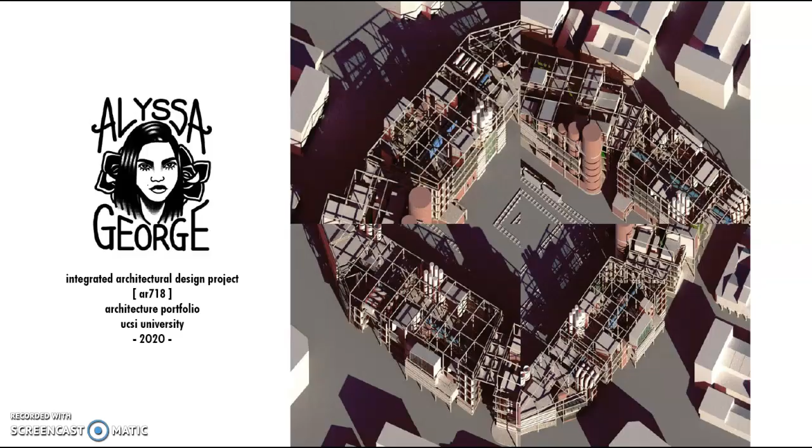George, and I'm in my final semester at UCSI University. Today I'll be presenting to you Kopi O, which is our final semester project located at Bukit Mertajam, Penang.

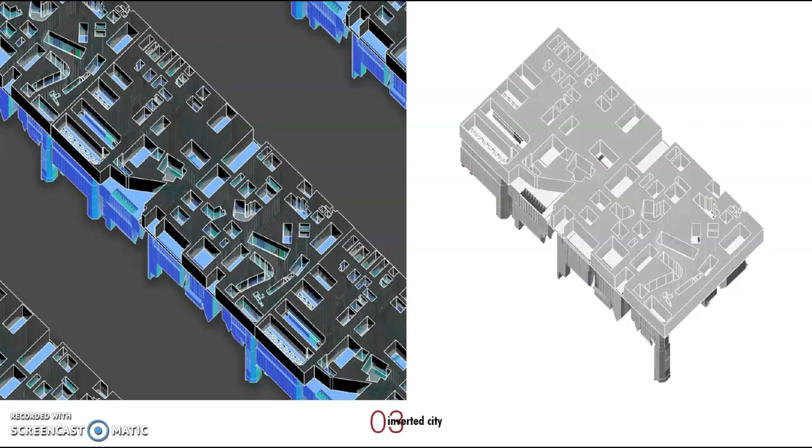Alright, so let's start with project 1. These are my dissections, and lastly, this is the collocation. These are the elements that I dissected from the town. This one represents the landmarks of the town. This one represents the town as a machine. This one represents the used and unused spaces of the town as an inverted city. And this is the final collocation.

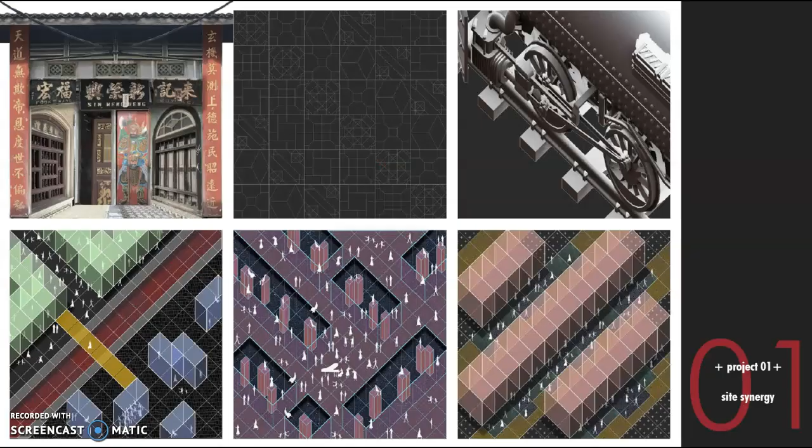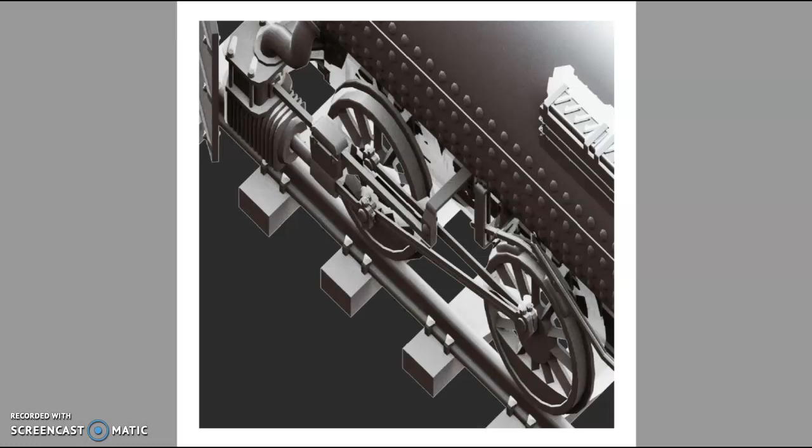Moving on, here are my site synergies. This represents the Chinese culture of Bukit Mertajam. These are the variations of tiles found at Bukit Mertajam. This represents a nostalgic element of the old train, as well as representing all of the single elements of the train which work together to form a whole system.

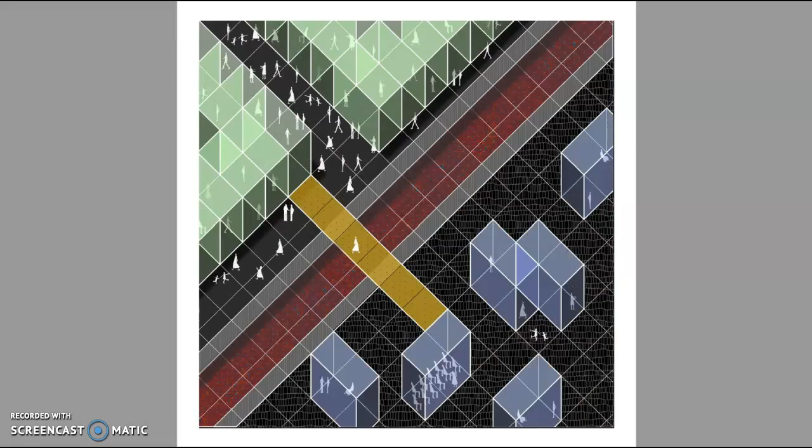This one represents the density and non-density of both sides of the town separated by the train tracks. This represents the used and unused spaces being inverted. And lastly, this represents the human behavior of Bukit Mertajam town, where instead of vehicles, the street is dominated by pedestrians and also stall owners.

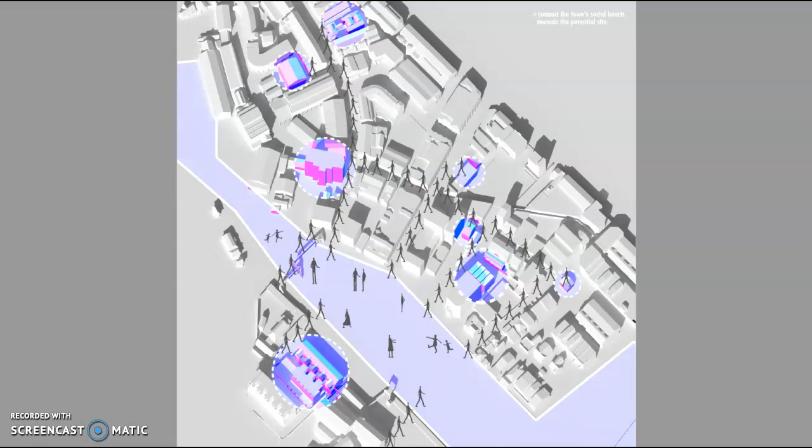Now let's move on to our urban strategies. So these are the strategies that I implemented to get my final design. Firstly is to connect the town's social hearts towards my site. Next is linking the voids and pocket spaces of the town to create a network of activities towards my site. And of course, creating a network between intergenerational communities from both sides of the town by implementing relevant programs.

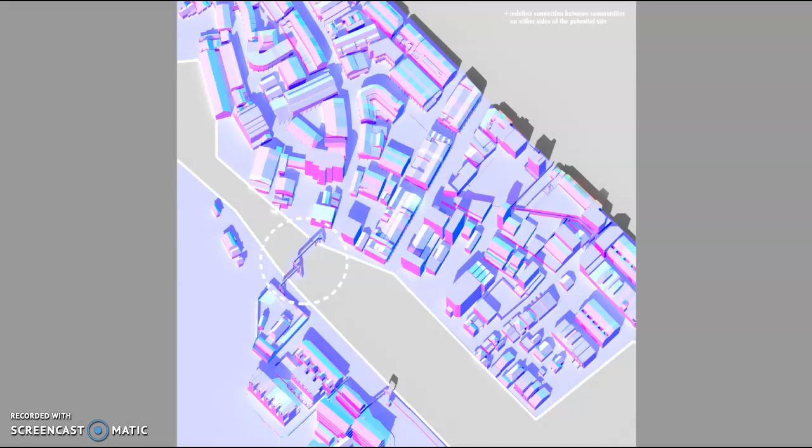As mentioned earlier, both sides of the town were disconnected by the train tracks, so I wanted to create and redefine a connection between the communities of both sides. And most importantly, also identifying the powerhouses of the town to integrate potential programming. In my case, I identified the coffee factory as one of the main powerhouses of the town, and I will talk about that more later.

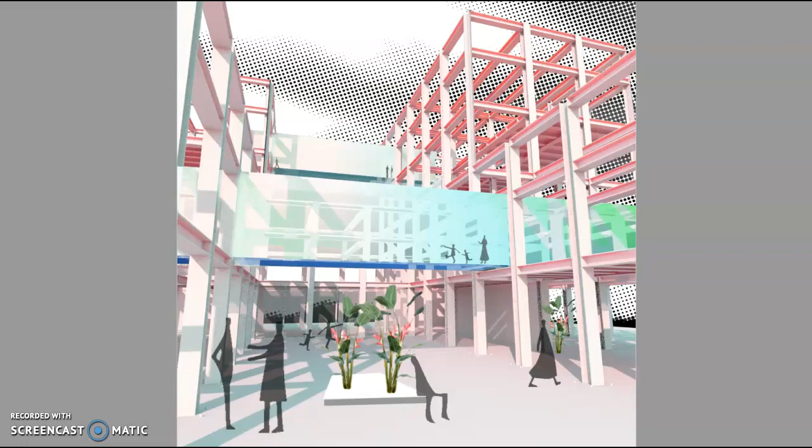So these are some of the earlier stages of my urban strategy design, where networks were created from the voids and pocket spaces of the town leading into my site. This is one of the existing landmarks of the town viewing into my project to create a new landmark for the town. And lastly, this represents the initial bigger picture of how I wanted my project to be by connecting both sides of the town and also by creating links between the buildings.

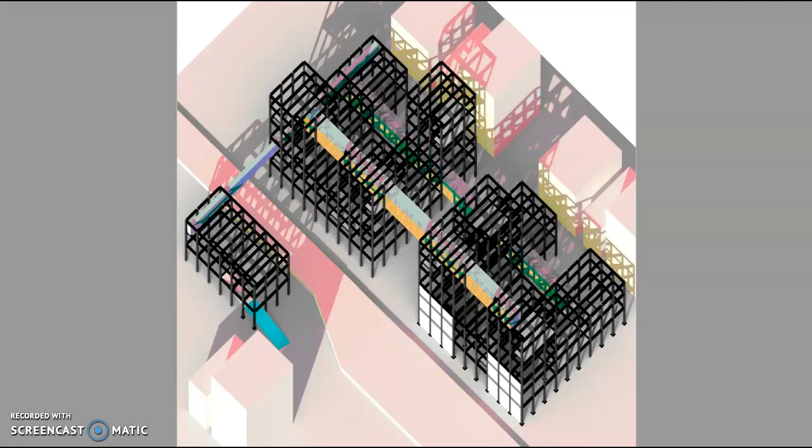So, as mentioned before, I recognized the coffee factory of Bukit Mertajam, which is Simhat Hand Coffee, as one of the main powerhouses of the town, with the reason being the whole town's coffee supply is supplied by them. And I thought that they were quite important to the town, as we all know that Bukit Mertajam is a dying town, and people go there mostly just for food and especially the coffee.

So although there are various restaurants all around Bukit Mertajam serving different food, every restaurant and kopitiam will still serve drinks and especially Bukit Mertajam's coffee. So by recognizing them as one of my potential clients, I came up with some of the main programming of my project. So these are the earlier stages of my main programming, ranging from production and economics, creation and recreation, educational and institutional, recreation and leisure, and of course connection and interaction.

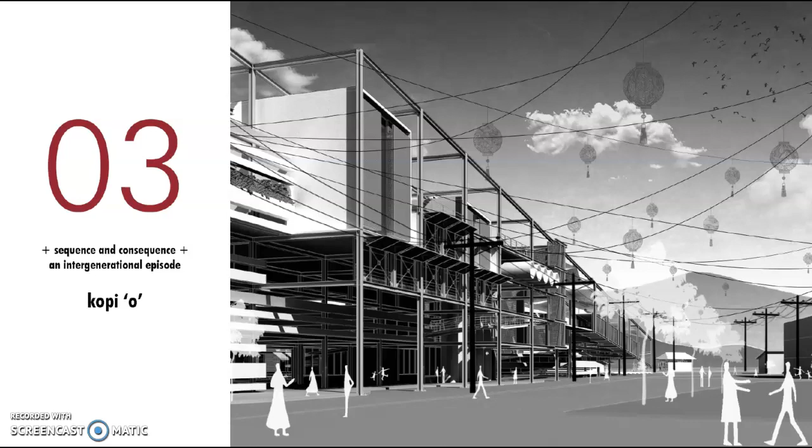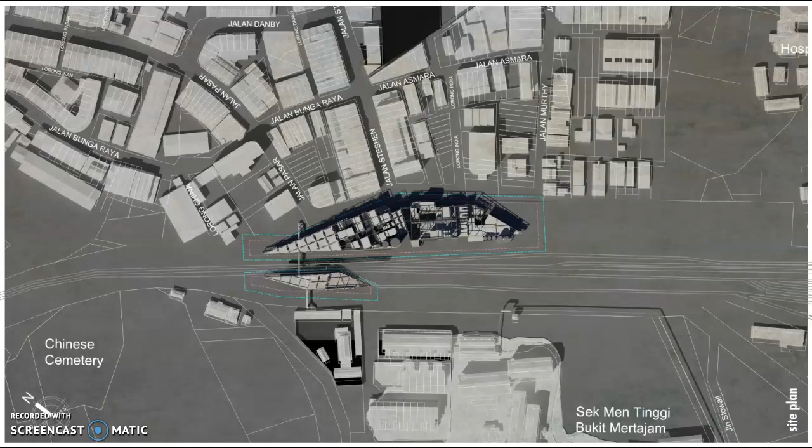Explaining more about the main programming and how I developed it in the following slides. So first off, this is my site plan. I decided to have my project at the end of Jalan Pasar, Jalan Stesen, and also Lorong India, as well as a portion of the opposite side. This is to lead pedestrians of all three lorongs towards my project and also break the disconnection between both sides of the town by creating a link. The coffee factory, which is located here at Lorong India, will also be linked to my project.

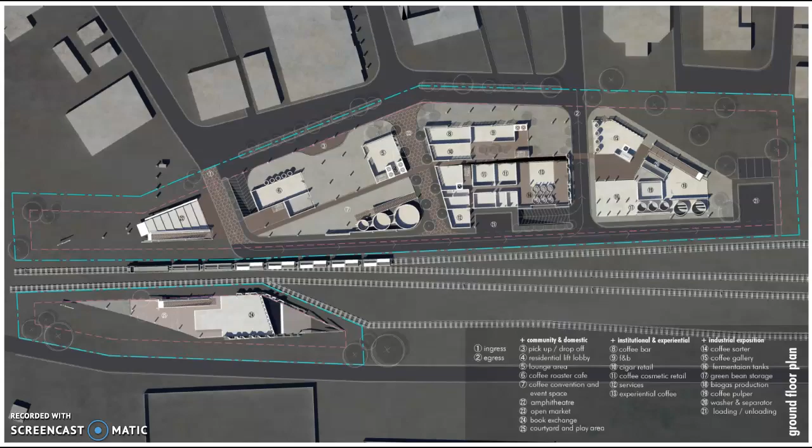So the main design intention was to educate the people and the public about the production of coffee. One of the strategies implemented was to spread out the production of coffee throughout the whole building. So the production of coffee starts from the far right over here, which is the industrial exposition, and next it goes into the institutional and experiential over here, where people are able to learn and experience coffee. And lastly, at the community and domestic over here, containing a coffee roasters cafe, coffee convention, and event space.

Going up to my second floor, this is where most of the institutional activities happen. So after researching, the Coffee Academy will contain 4 main workshops located in the institutional and experiential block. As the possibilities of coffee and coffee production are endless, I've also left space on the main frame to be extended or expanded in the future.

So this floor would be the semi-private floor connected by this connecting tube over here, where the public are also able to go up to and learn and see how people are making coffee and learning about coffee.

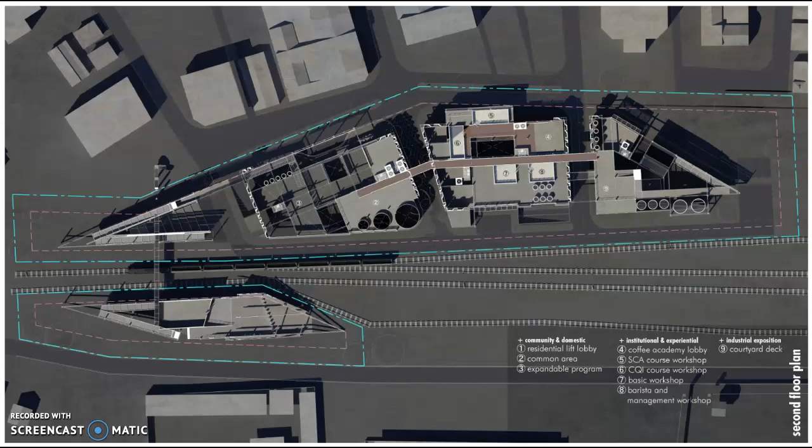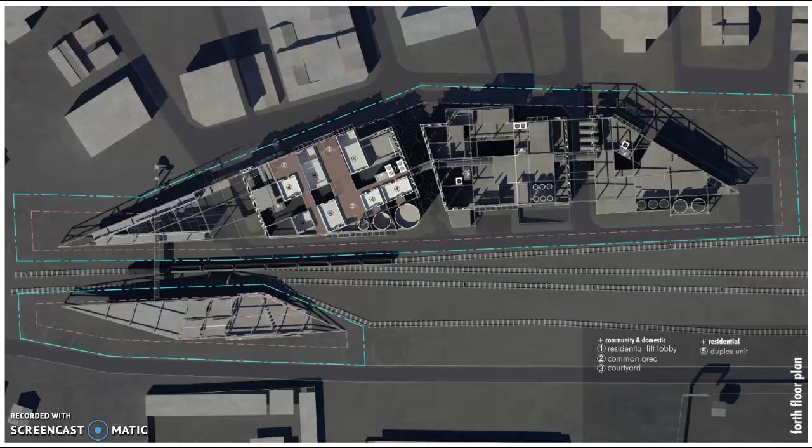Moving on to my 4th floor, these are the second floor of the duplex units, which also have access to common spaces and pocket spaces above. And that's the end of my floor plans.

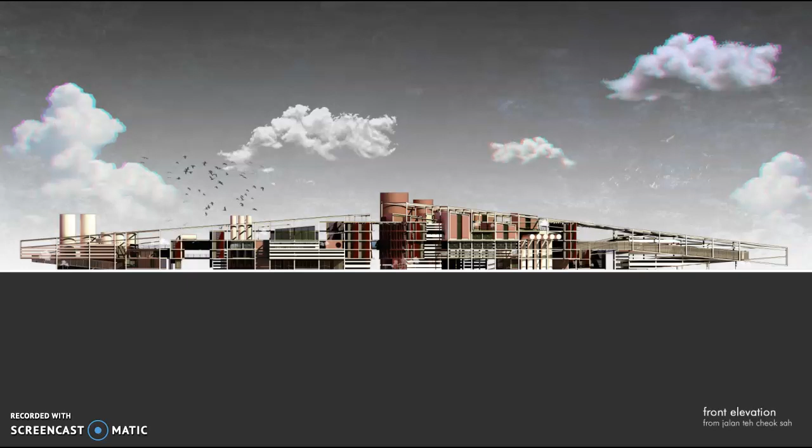Next, here is the front elevation from Jalan Teh Cheok Sah, which I further broke down into the 3 parts of my project. This part would be the industrial exposition.

The middle part over here will be the institutional and experiential, where the programs are stacked on top of each other. Lastly would be the communal and domestic, where the coffee roasters are located, with the periscope structure emitting coffee odor to attract the public coming into my site.

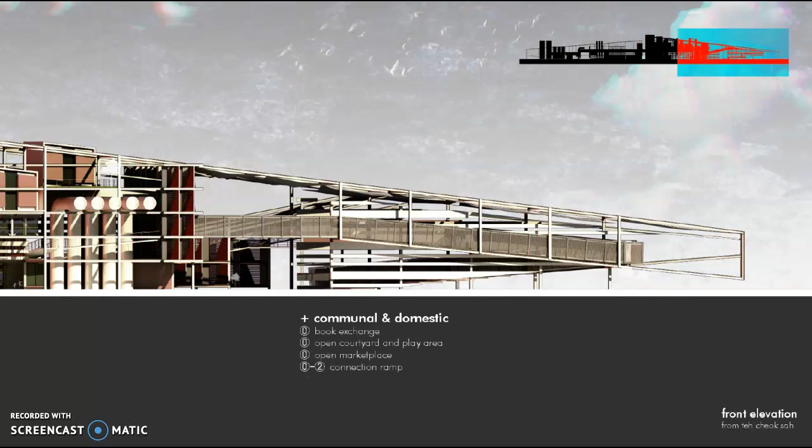Moving on to my rear elevation, this is the bigger picture, and now let's look at it zoomed in. So this would be the entry point of the people from the opposite side, mainly students, teachers, and also people working or living on the other side of the town.

Students can go over here to the book exchange after school and also the rooftop garden while waiting for their parents to pick them up. I've also designed a community cafe over here as the meeting point for both sides.

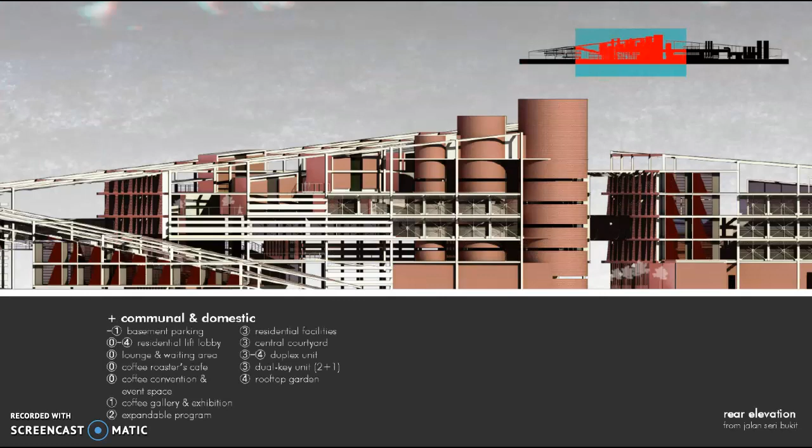So here's the rear view from the school of my communal and domestic, where you can see the rooftop gardens over here and also the residentials. The coffee production elements, such as the coffee sorter, can be clearly seen, as well as the connecting ramps and bridges.

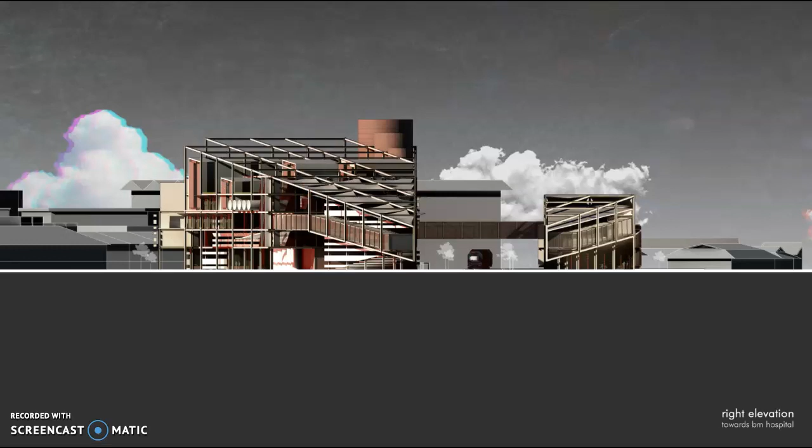Over here you can see there's a very drastic fall and angle in which I designed my project.

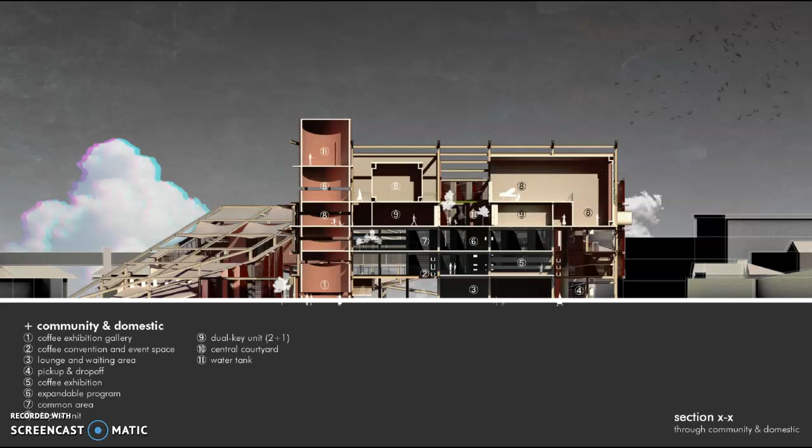So this drawing represents my section cutting through my communal and domestic. The spaces here are stacked on each other from the main I-beam frame, also to create multi-level spaces and voids.

The ground floor shows mainly the coffee convention and event space, then stacked on top of it is the coffee exhibition gallery, and on top of it are all the residential units, in which you can see different types of units, which is the duplex and also the dual-key units.

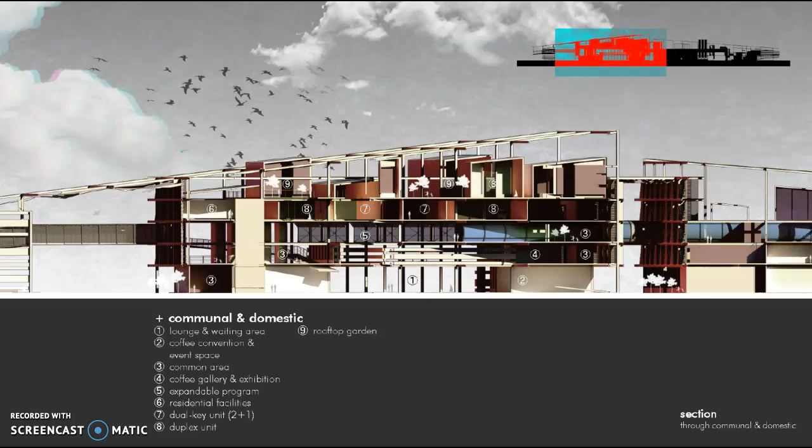Here is my master section, which I will be cutting through all 3 parts of my building. So here is my communal and domestic, where again the spaces are stacked on top of each other, as well as the gardens over here stacked also, to create a more natural and more Bukit feel, since it's Bukit Mertajam.

As you can see, all of the gardens are stacked on each other, just an homage to Bukit Mertajam. And here's a cross section of the industrial exposition, where all of the elements can be seen clearly.

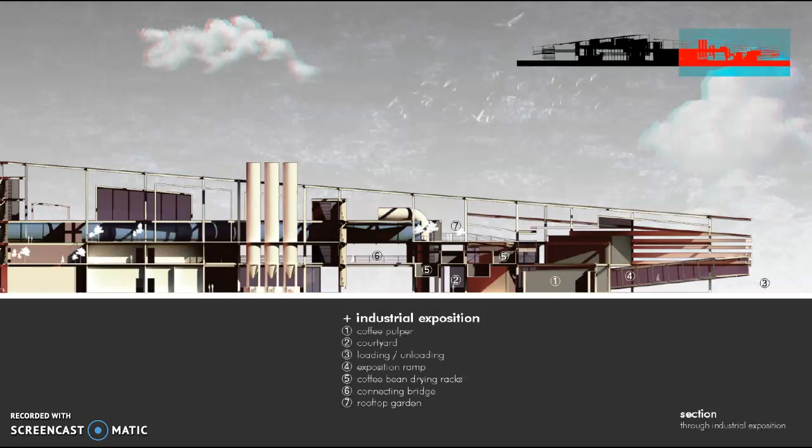So here's just a GIF.